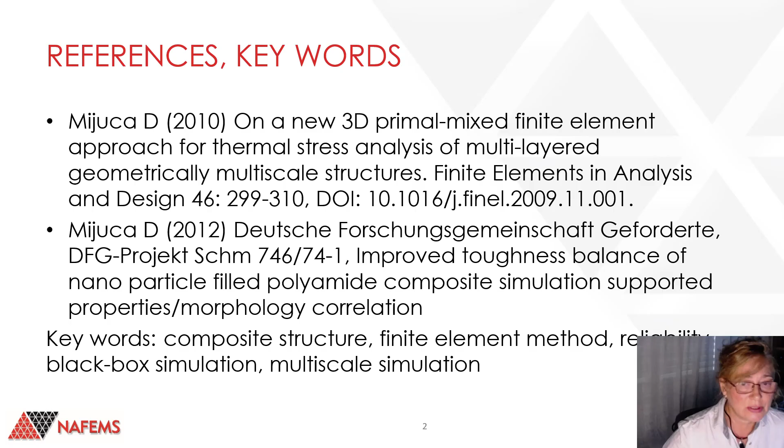In this slide you can see some of my references, one paper and one project related to the present approach and application. And the keywords of the present talk are composite structure, finite element method, reliability of finite element method, new finite element approach as a black box to the user, and also multiscale simulation.

Interesting issues related to design of the composite structures are selection of the composite type, selection of volume ratio of matrix and reinforcement, selection of number of layers, its position and final thickness of the composite, also the price of manufacturing, testing and attestation, and also prediction of behavior and failure modes and location of the failures.

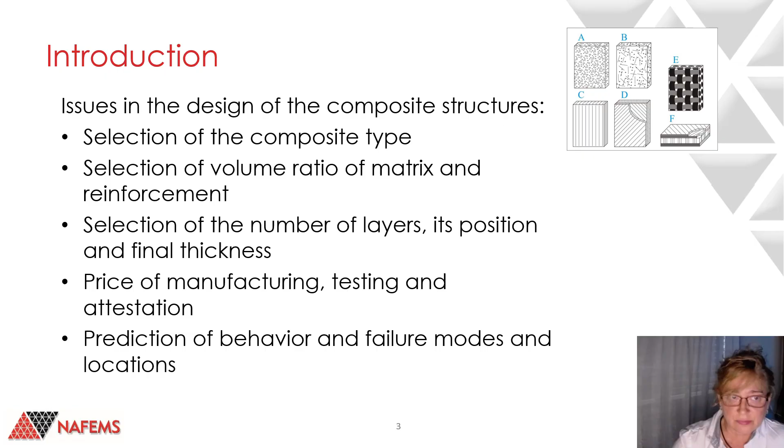The goal of the present work is to announce the new finite element approach that is simple to use, that has straightforward transition from computer-aided design to finite element method, that is reliable, that has only one finite element type, that is hexahedral finite element. It contains simultaneously displacement and stresses, and so boundary conditions for both variables can be introduced directly.

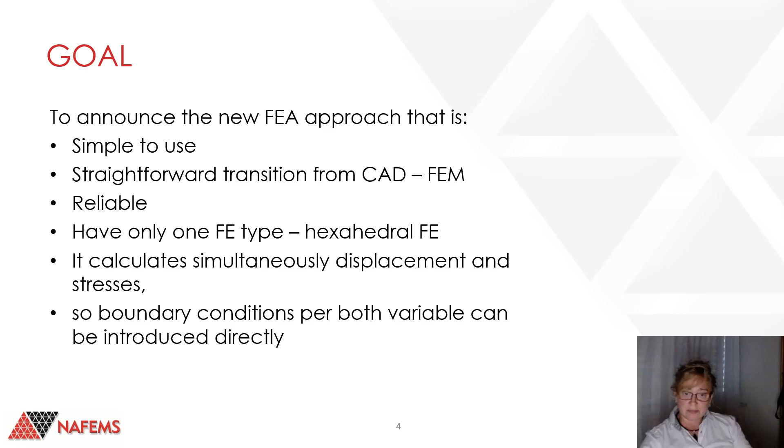Some of the usual stressful issues in the composite structural design and calculation are, for example, who will quickly, cheaply, and accurately tailor my new composite to maintain the strength of the old metallic part. And also, I can only use plate finite element type, so will I have some problems with extraction of data? Let's address some of these issues later in the presentation.

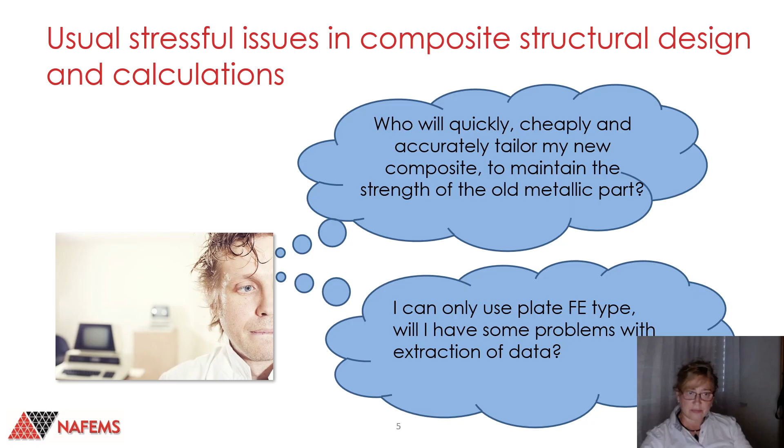So, as I said already, the present approach is based on hexahedral finite elements only. It is robust, stable and accurate, which means that it is reliable, it is spatially multiscale, it is time efficient, and thus it minimizes the risk-related modeling errors and accurately determines possible failure modes and locations.

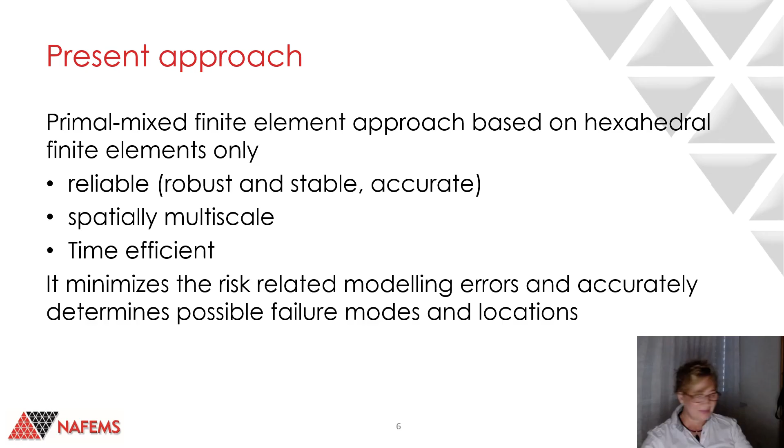In this slide you can see the primal mixed formulation, which I named FEMIX. It is reliable even if its finite elements are extremely stretched and skewed. We will see that it is reliable up to 7 orders of magnitude in each of the finite elements.

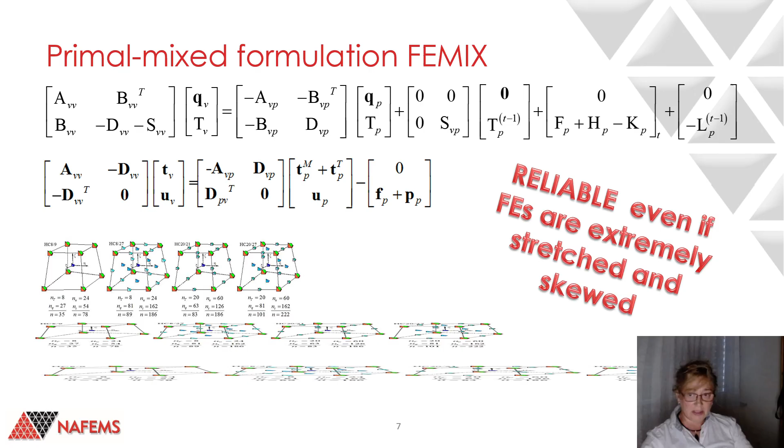For the present finite element approach, I have written in-house software FEMIX. It contains only one finite element type, that is hexa. It can be embedded between commercial preprocessor and in-house or commercial post-processors. It can be used also for material parameters identification, and for standard and non-standard finite element simulations, for composite, rubber, coatings, and it is thermomechanical.

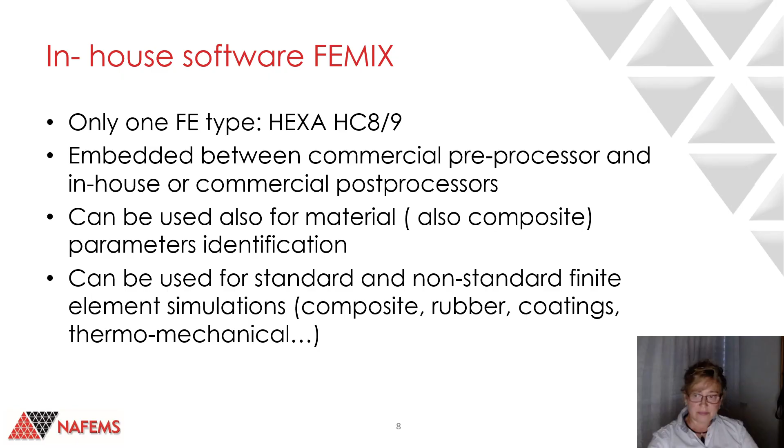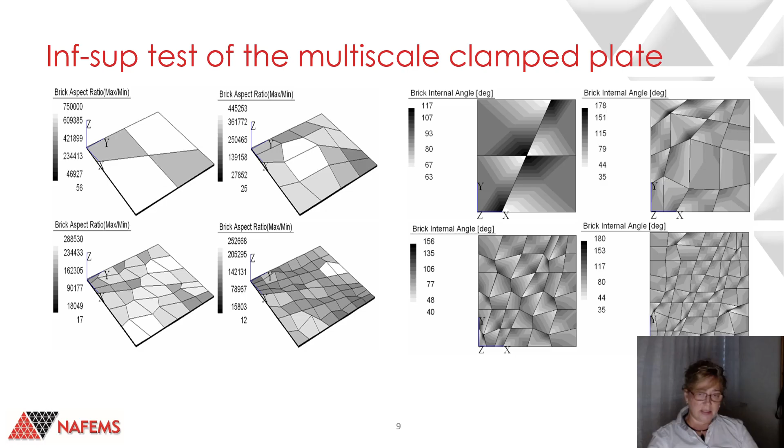Order of magnitude of difference between minimal and maximal axial dimension of the finite element can be up to 7 orders of magnitude, and brick internal angle of hexahedral finite elements can be up to 180 degrees. The mesh is deliberately chosen to be as it is to prove the reliability, and reliability is proven.

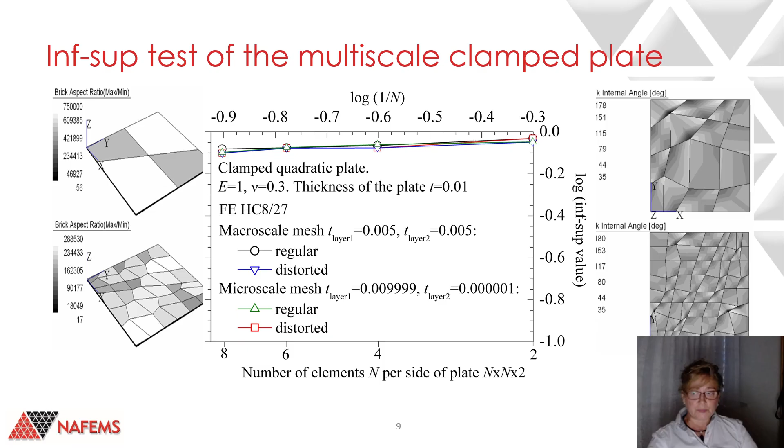As we can see, the resulting curve is flat, and it is reliable for regular meshes or distorted meshes as shown. And we can see the thickness of one of the layers in the present example is only 1/10 of the micron. So it is reliable.

The dimension of the sample is 7.3 millimeters. It contains 26 layers. Layer thickness is 0.27 millimeters, and bond thickness is 0.01 millimeters. Optical core is very tiny, it is only 0.125 millimeters, and we will be interested in the stresses in the optical core, because if the tensile strength of the optical core is exceeded, we will also notice that the signal in the optical fiber is not good anymore, and that is the purpose of this optical fiber in this nondestructive testing.

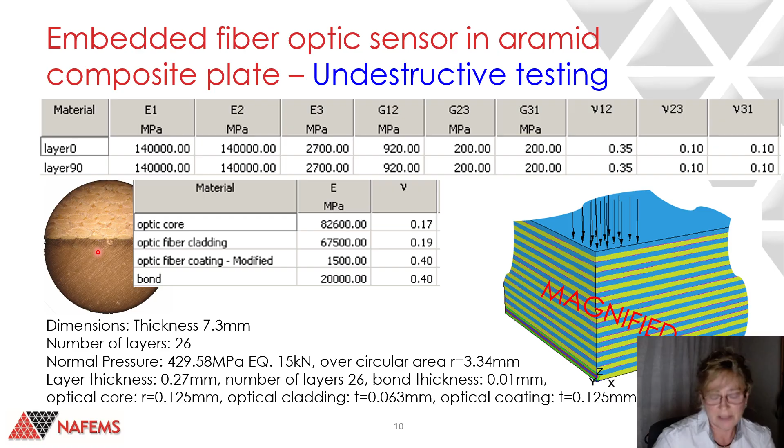In this slide we can see the specimen which will be used for the validation of the present approach, because the loading disturbs the specimen only very locally. The testing points can be very near, and the calculated displacement below the applied force is 1.1 millimeters for the applied force of 15 kilonewtons. And you can see the optical fibers, they are very tiny, and they are placed between the first two layers of the composite.

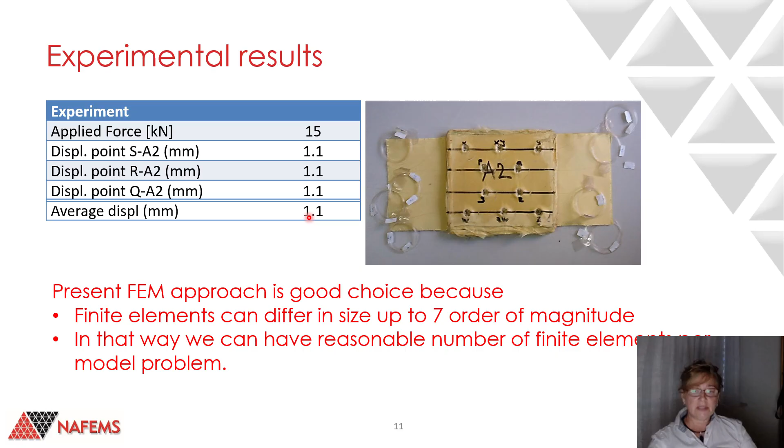We can instantly notice that the present finite element approach is a very good choice, because finite elements can differ in size up to 7 orders of magnitude, and in that way we can have a reasonable number of finite elements in the model problem, not too much.

We will see that because of the special feature of the present example, that applied loading disturbs material only very locally, there is no difference how big the finite element model problem is far away from the loading. And we can see that for all 4 finite element meshes we obtain the maximal displacement, which corresponds to the experimental one.

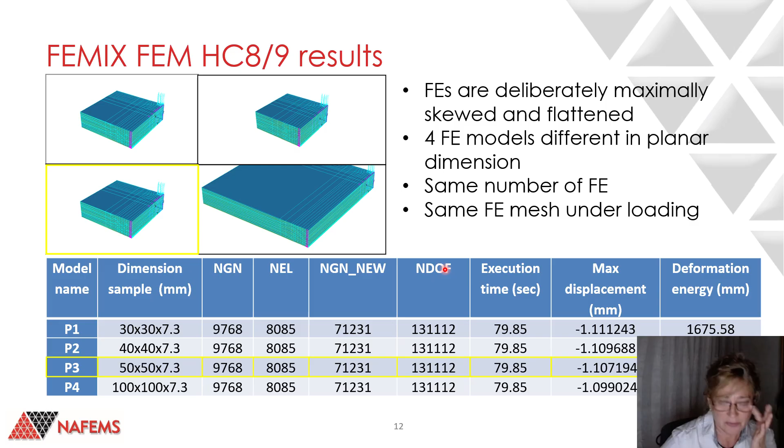Execution time is 80 seconds. Number of degrees of freedom is 131,000, and number of finite elements is 8,000. Such a big number of degrees of freedom is because we have degrees of freedom also per stresses.

And so let's recall that in the finite element displacement-based approach, we can have aspect ratio up to 4 orders of magnitude without disturbing the accuracy of the results, and also only up to 40 degrees of internal angle.

In the present approach, aspect ratio in each of the finite elements can be up to 9 orders of magnitude, which is almost on a nanoscale. And also the internal angle can go up to 180 degrees, so the brick can transform to a prism, and we will be totally safe and accurate with results.

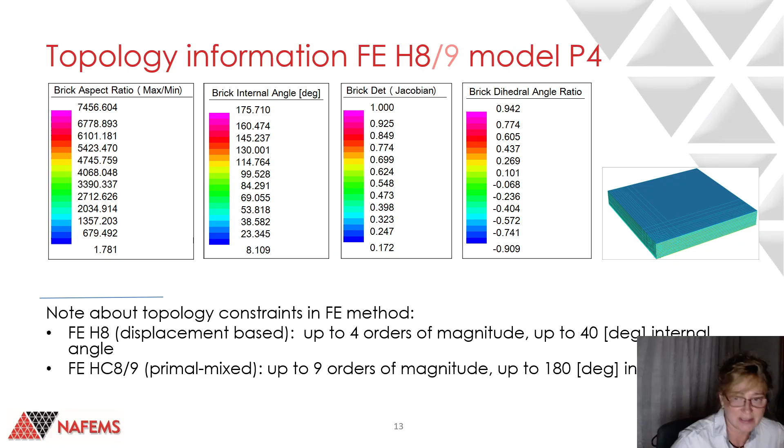Let us now start with visualization of the results. And firstly, we can see that maximal displacement is as measured one, and that there is no spuriosity in the visualization of the displacement field per component in the direction of the loading.

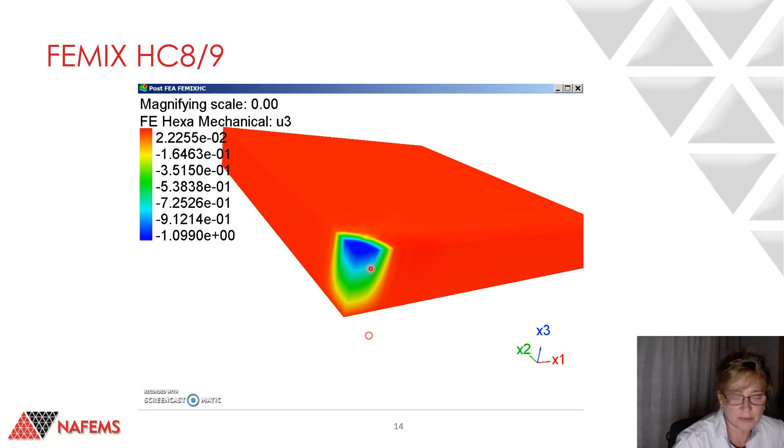Now let's see how it deforms. It deforms smoothly and nicely. It reacts on the mesh. Here we have a very skewed finite element. And now the other displacement and shear stresses, optical fiber.

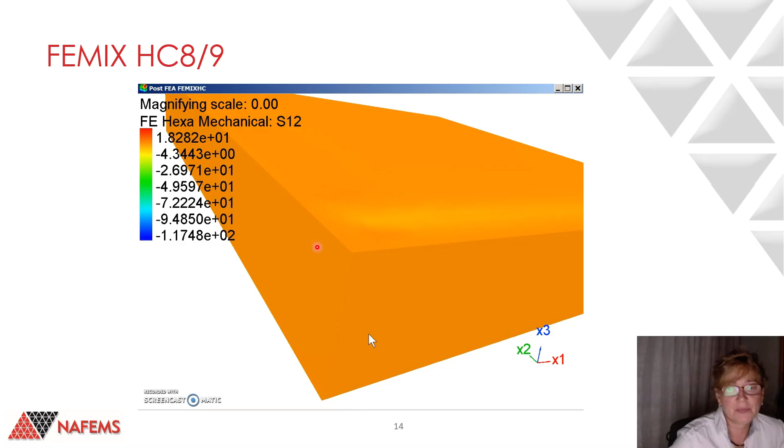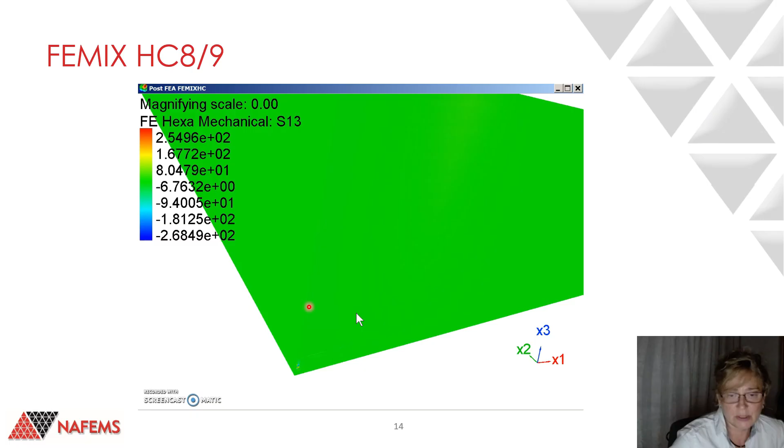And also we can see the maximal stress component and how we see a bond between the layers, and also we saw the optical fiber, and also here optical fiber, and that will be everything about the visualization of the results.

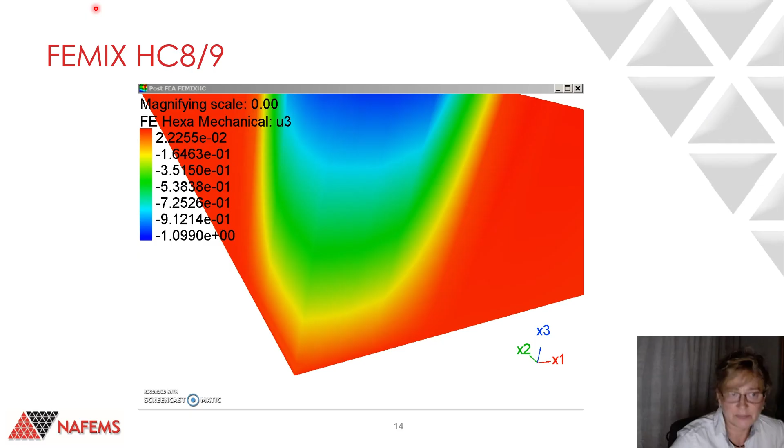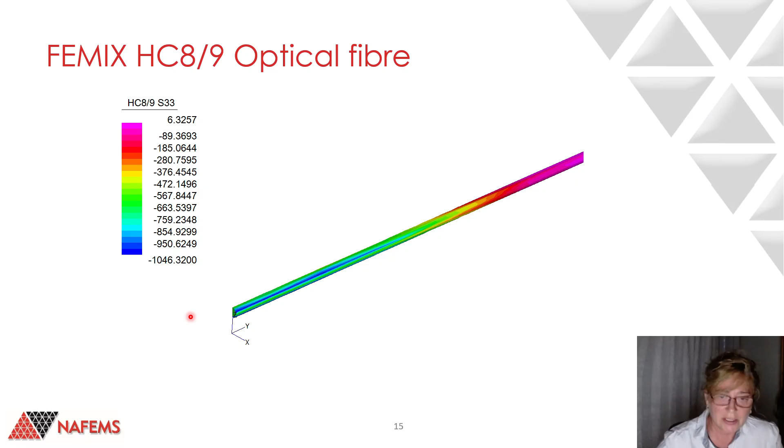So per optical fiber, the maximal stress is 1 gigapascal, and we can see that the optical fiber will feel that loading, and we will probably have the loss of signal in the optical fiber. So the personnel will notice that something is happening with the protective composite barrier, and personnel can react accordingly.

Let us now investigate the strain field in the direction of the loading. And as we can see, this is in the perpendicular coordinate system, but if it is a natural coordinate system, we will have everywhere here the blue maximal values, so we can see that the strain is maximal on the edge of the loading circular area.

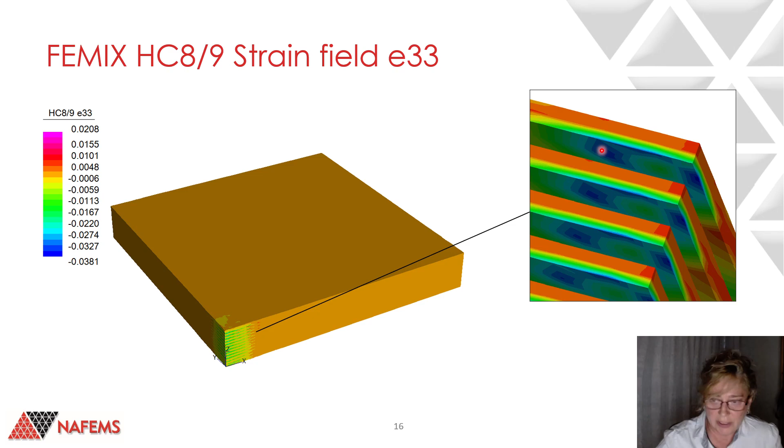In this slide, we will see how this model problem will be calculated in a commercial software package, one of the very good commercial software packages, in which finite elements are seamlessly stabilized by mid-side nodes, seamlessly from the user. But anyway, we have bad convergence and also meaningless results for the final mesh.

So as we all know, this is just confirmation that the finite element displacement-based procedure cannot be used for such a kind of simulation of completely not approximated per geometry composite material.

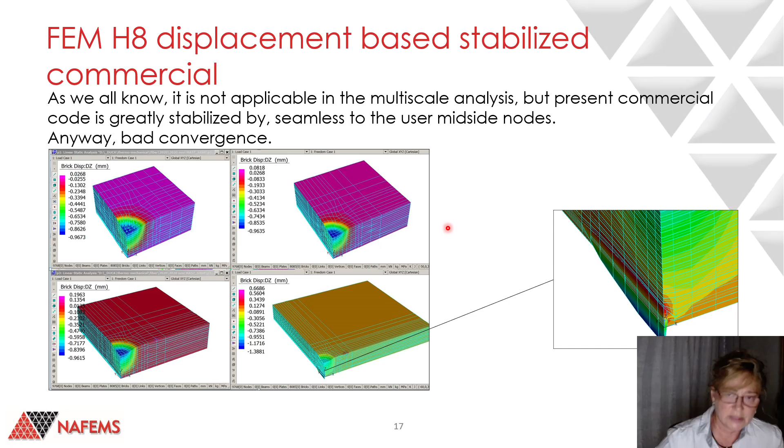Anyway, every finite element animation looks nice, but the accuracy is under question without validation. Even validation is expensive. Engineers will rather use more expensive experiments than finite element simulation, which is always less expensive.

And maybe the answer for why engineers see the finite element technology as a commodity is because finite element software is like a cookbook. A good cookbook will not make a good chef. So it is not guaranteed that the solution will be accurate.